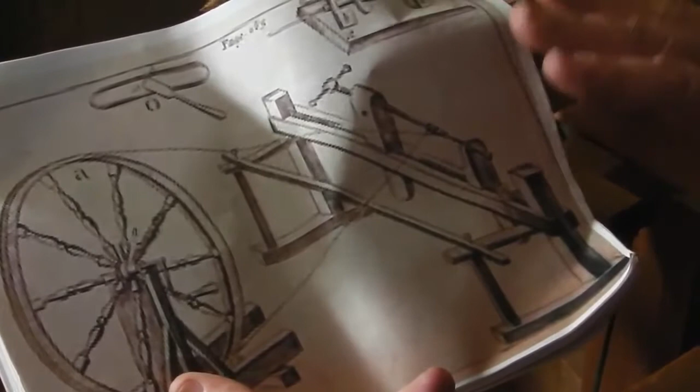Latest update on there, I've got a drill bench working. The picture that you can see in front of you here is the actual drill bench in the diagram from Joseph Moxon. You know my lathe, you've seen it before, you've seen the great wheel working, you've seen all those things. That's a little side rest, we won't go into detail on that.

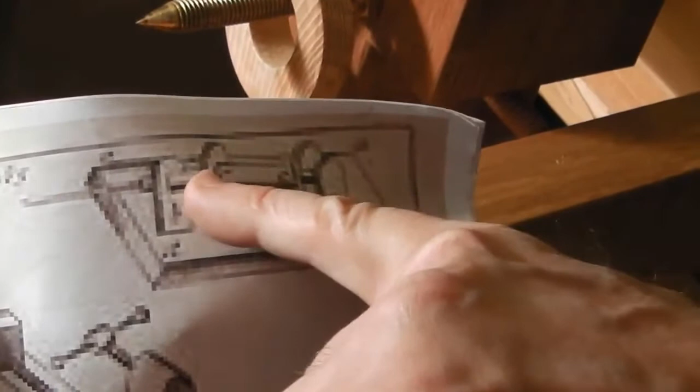This here is the drill bench. 18 inches long, this drill bench. He describes it as having a metal strap underneath. I'll show you that later. I've followed his description. He's got a stile at the front and a stile at the back. A stile, call it a leg. Notice the length of this pulley here. I thought, why on earth has he got such a long, flat pulley?

He talks also about a piercer bit. Anyway, we'll go into detail. I just wanted you to see the Joseph Moxon picture. All these letters here, all in detail, explaining what every part of this is. Pulley, stile, piercer bit, etc. So, anyway, onto the drill bench itself.

Okay, here's my pricked piece of stock here. I've just put a point in there just to give it a guide for the drilling process. I've got a piercer bit here that I've made. This is the same as the 17th century ones, as much as I can gather anyway.

Trouble is, the flat drill bit that I've converted here has a hex shank, which has created some problems for me. So, for the purpose of just the drilling demonstration here, I'm using a modern drill bit. It's a modern lip and spur, because basically it just fits into there for now, but that will change as time goes by. Well, let me demonstrate exactly how this works.

Using the treadle, which I will show you later, you press down on there like you would any kind of drill bit when you're trying to make a hole, and you'll see I'm turning the whole thing 1/3 turn, just like Joseph Moxon describes. Well, actually he says to turn it deftly. I'm not sure how deftly I'm actually turning this.

He reckons that what it does is it keeps the whole thing centred, and I think he's probably right, but I've noticed the other thing that it does is enable the string to go back up, to return. So it also has that, I would say, added advantage to it. Now you might say, why would a wood turner use a drill bench when he could use a brace and bit?

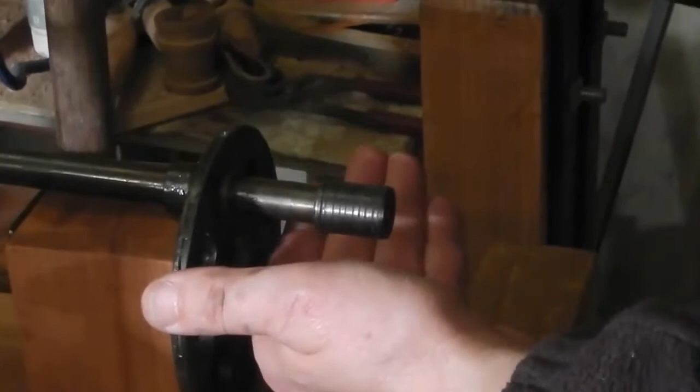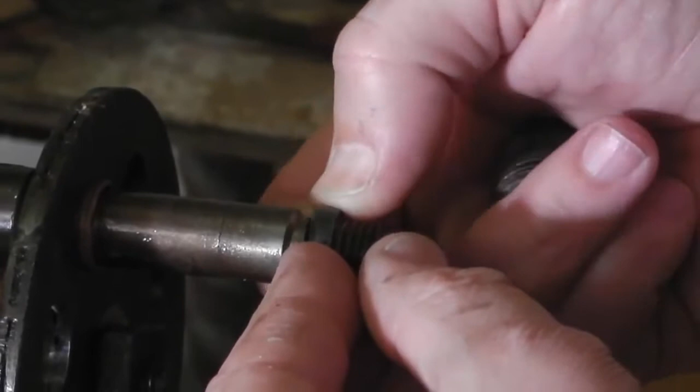I take this out here, and this is where the clever design comes in. It's not something I've thought of myself. Do you see that drop out there? That little piece just dropped out there. Now I've put my string back on purpose so that I can turn this round so you can see where that goes. Can you see that little slot in there? What happens is the little slot there is tapered at the back. So when the collet screws on in place here, what it does is it pushes down on this little piece here, and that tightens my drill bit.

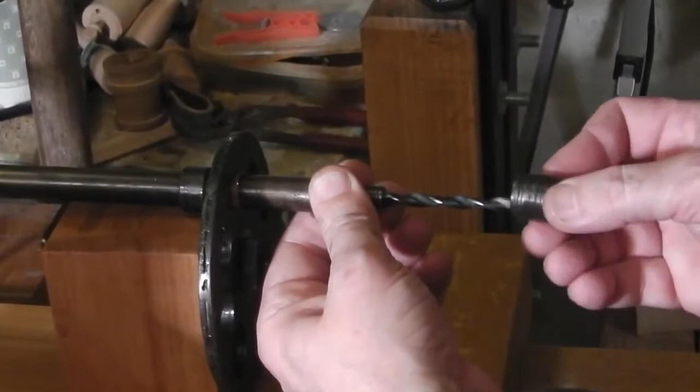Now there's no explanation in Joseph Moxon about that at all. That's something that my clever engineer designer has come up with all by himself, and I think it's an absolutely brilliant idea. But what Joseph Moxon talks about is the drill bits either being permanently fitted to each mandrel, or he talks about different size ones being slotted in or fitted in. He doesn't actually explain how that happens, so we've had to come up with this design ourselves. Well, I say ourselves, he's had to do it by himself. So it's a brilliant little design there that I thought I'd show you that makes sense.

And I have an old brace and bit that they call a wimble from the period, as I explained before, a wooden one, yeah. And that has something very similar inside it. It's like a little screw that goes in, or a little peg or something that jumps out slightly when you shove your drill bit in.

You know. Anyway, I'll just tighten that up a little bit more because it's going to come loose. So I'll just tighten it up with that, just so I've got that extra tightness on there. It's not tightening too much, otherwise it will slip on the leather. But the main thing is, it holds that drill bit in place there. You notice it was a round shank on there. Well, what I've done is I've just filed just a little bit square so that it seats nicely into that part there. So, let me show you now how the whole thing is constructed.

And again, from the pictures, this engineer friend of mine, I've mentioned his name before, Peter Trett, who I'm very grateful for, has designed all of this for me. Square nut on there. Much easier to make square nuts than it was to make hexagonal nuts. Square piece of bar, cut off into slices, using a common term, and then drilled and then threaded. Makes sense, doesn't it, rather than going to all the efforts of a hex.

So, I'll leave that in my box over here. You can now see that what can happen is this whole thing can move along here. This here is a separate plate. I'm not going to take that plate off, but I could do if the collet wasn't there. Bring this to the end here, and you'll get the idea how the rest of it works.

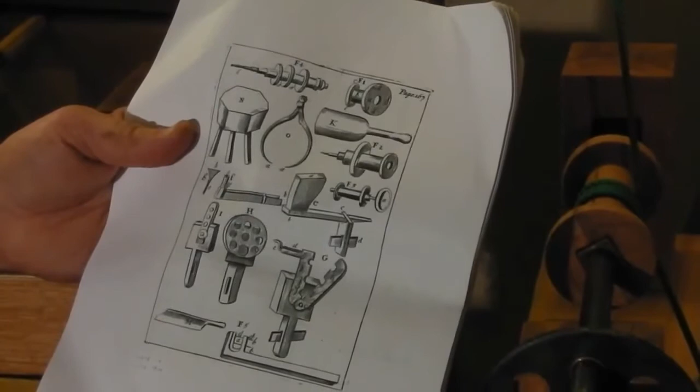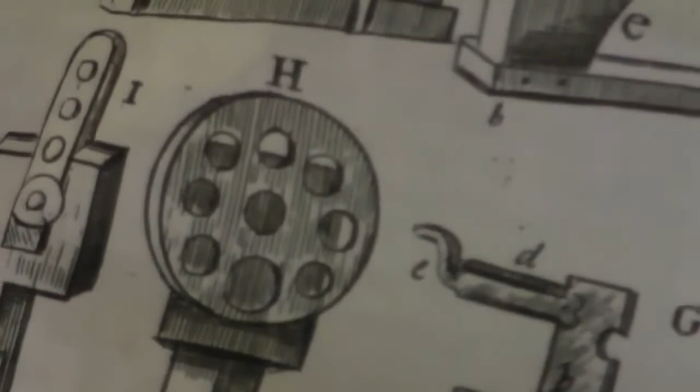Okay, my final point. Joseph Moxon, in one of his other diagrams, shows different, what he calls, collars. You can see one that's mid-bottom, called H, the circular one with the holes in. Next to it is I, a simpler one, and then G, a much more complicated one. Then he handily, I think maybe he knew the person who made these, actually gave the address where you could go to get them made because they're quite complicated.

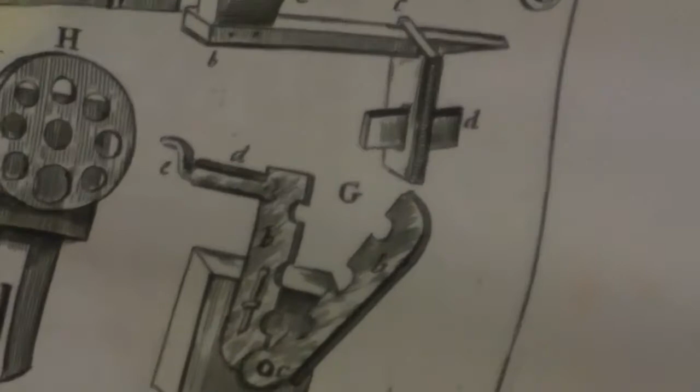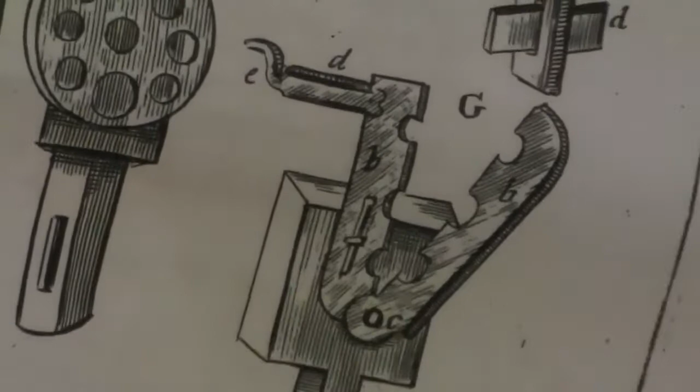Those on the right there, the ones called G, they're the clamping ones if you like, if you're using wooden mandrels, so you can use different sizes. I didn't need that because I opted for the metal mandrels. Now, looking down you can see various collars on the page there. I won't bore you with the details on all of those. I'll just show you a demonstration of how mine is similar, or the same, I hope anyway, as H. You'll notice he shows it on a puppet. That's a puppet that can be on the lathe.

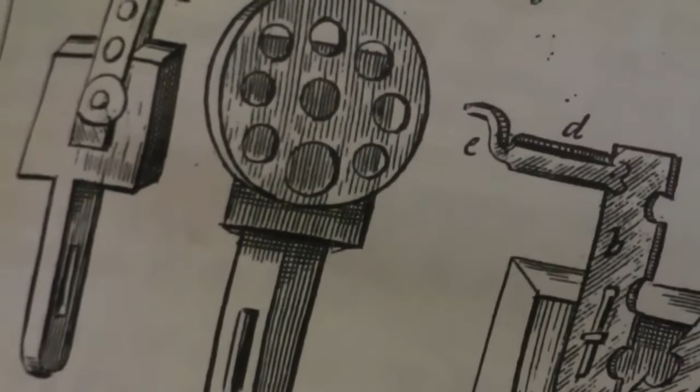When he's describing the drill bench, he says any one of the collars shown on plate whatever, I forget the number of it now, can be used on the drill bench. So I could have used any one of these. Or, he says, you can even use just a wooden board with a hole in it. I've gone for the circular one.

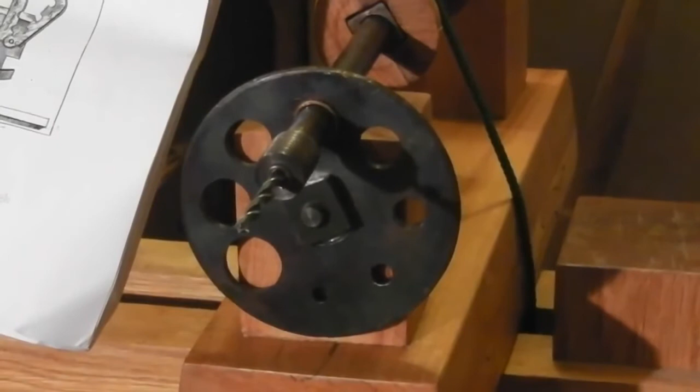This, as you've already seen, will detach from here. The round plate will detach from there just by that locking nut that I've got on there, and can be placed, as you can see in the diagram, as a collar on a puppet, so it can be used as a steady on the lathe. That's why there are different sized holes in this. So anybody who's watching this thinking, well hang on, he's only using one hole on this drill bench. Why on earth has he got a round plate with all these different holes in?

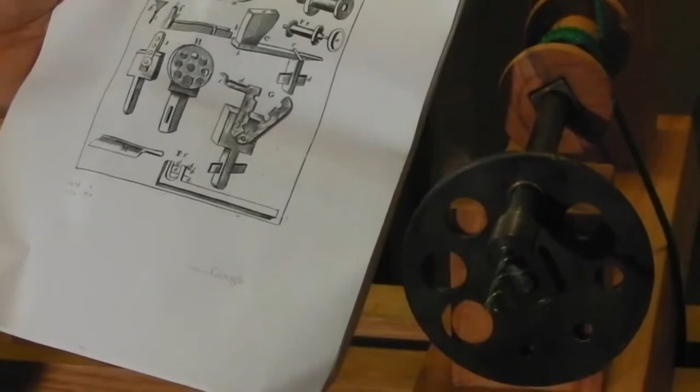And that's because Joseph Moxon says this is a steady, and the collar that you use as a steady can be used on the drill bench. So I wanted to explain why I've chosen this one. It will rotate, so you can use any one of the different holes. Perhaps that's for another video though, when turning small pieces of work, almost like dowel, say half-inch, quarter-inch stuff.

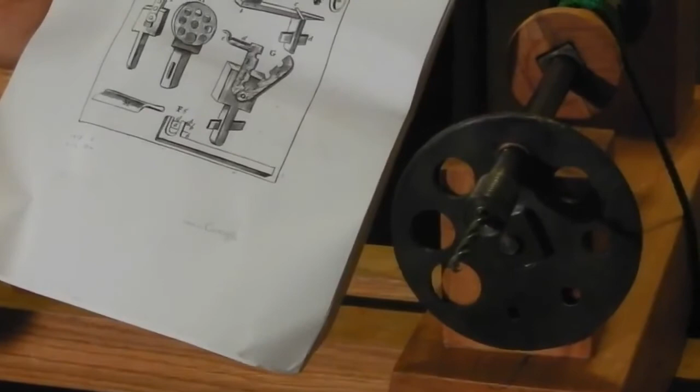Anyway, thanks for watching the video. I hope you've enjoyed it, and I hope I've brought the Joseph Moxon drill bench to life for people that wanted to know how a 17th century wood turner would actually bore holes in his pieces of wood to fit them to the worm screws on his lathe, so he can then get in at the end of them and turn them that way rather than between centres, or so he can bore deep holes in boxes before then turning them out. Perhaps, who knows, but that's how the drill bench works.